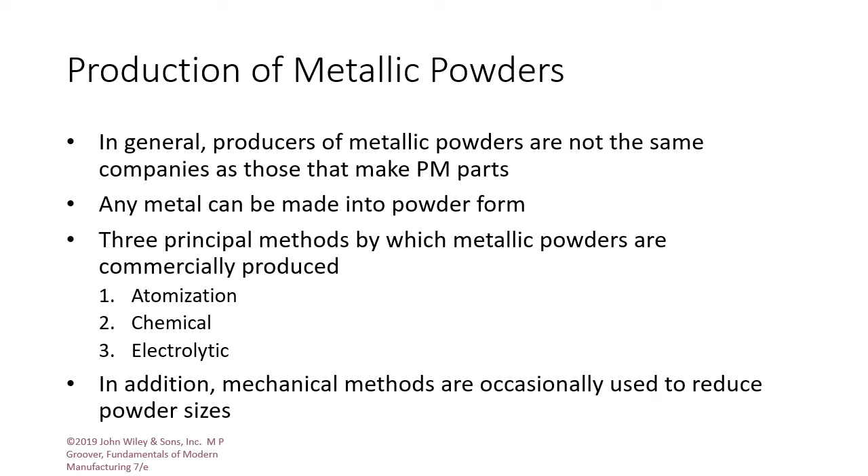The first method we will talk about is the gas atomization method. This method is based on the conversion of molten metal into a spray that solidifies into powders. So we have metal, which we first melt, and then using a high velocity gas stream that flows through the nozzle, we take the molten metal and spray it. During the spray, it will turn into solid powder.

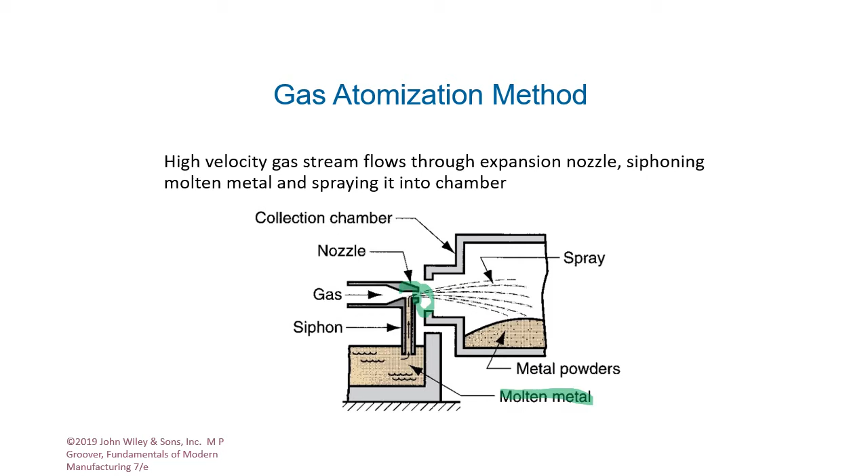We can use water instead of gas for the atomization method, which is very similar to the gas method. Here we have high velocity water streams that flow through the nozzle, water from this side, water from this side, and again we have the molten metal. We can see that it will solidify and turn into metal powder.

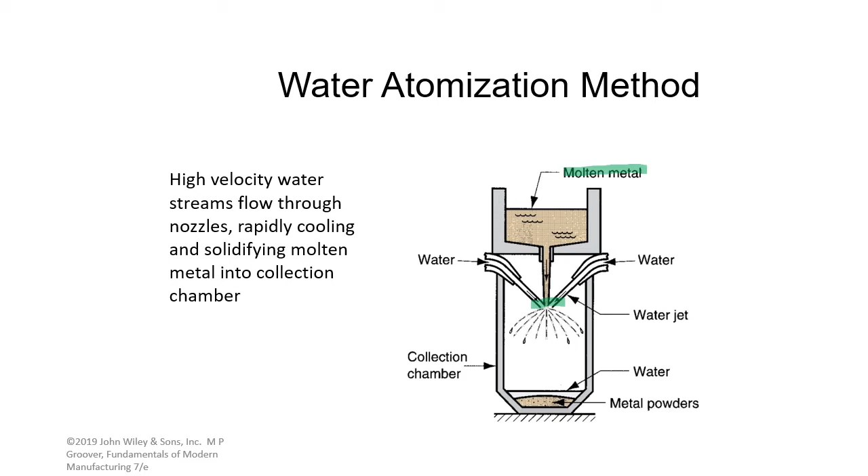The water atomization method is more commonly used and is specifically suited to metals that melt below 2900 Fahrenheit. In this case, the cooling is more rapid and the resulting powder shape is irregular rather than spherical. This is an example of iron powders produced by water atomization. You can see that the particles are not regular and we have different shapes.

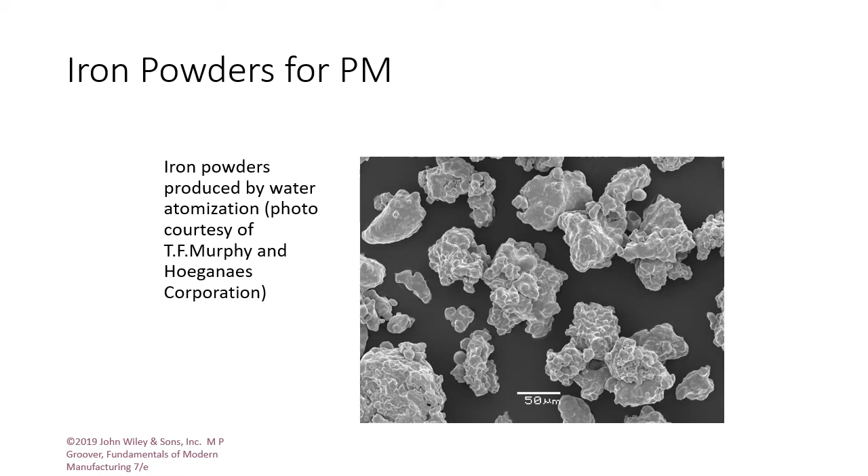The other two types used to produce metallic powders, chemical and electrolytic, you only need to know the names of these procedures. You don't have to know all the steps and procedures. So we're just focusing on atomization with its two types, gas and water.

Now, after producing the metallic powders, we need to use that powder to make products and parts. This step is called conventional pressing and sintering. The conventional PM sequence consists of three steps. The first step is blending and mixing of the powder. Next is compacting, in which the powders are pressed into the desired part shape. After getting the desired part shape, we have sintering, which involves heating to a temperature below the melting point to cause solid state bonding of the particles.

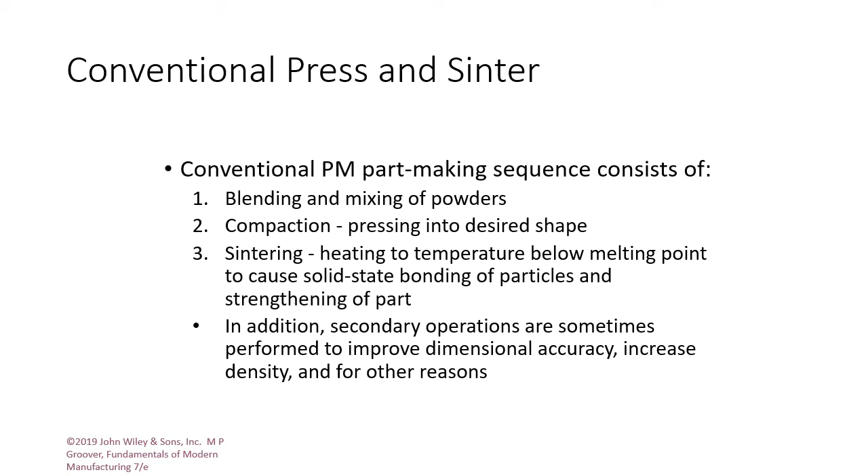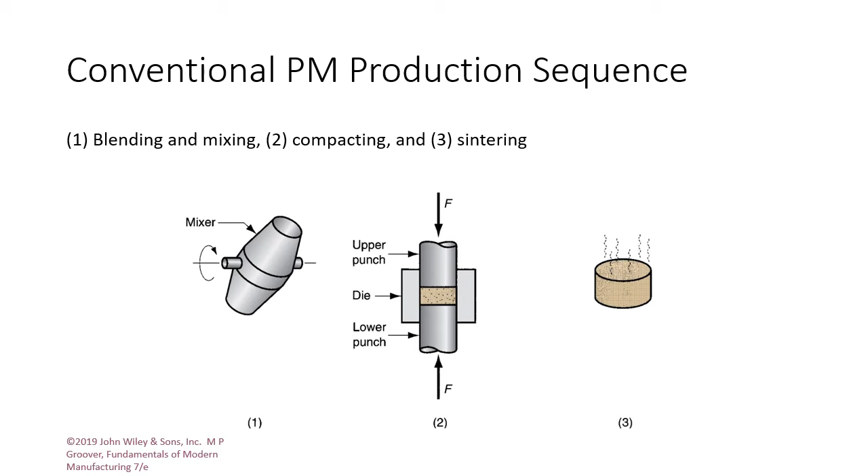In addition, we have secondary operations, sometimes performed to improve dimensional accuracy, increase density, or for other reasons. But these are the three main steps in the process: blending and mixing powder, compacting or pressing by applying high pressure, and then applying heat to get the desired shape. After each of these steps, we are trying to make the particles of the powders as close to each other as possible, and the shape as accurate as possible.

Before the compacting and sintering processes, and in order to achieve successful results, the metallic powders must be thoroughly homogeneous beforehand. So we have two main steps. The first is blending, when powders of the same chemistry but different particle size are blended together, which reduces the porosity of the powder. Then we have mixing, when we mix different types of metals together. This is one of the advantages of using PM technology, which gives the opportunity to mix different types of metals into one product, which would be difficult or even impossible to produce by any other type of process.

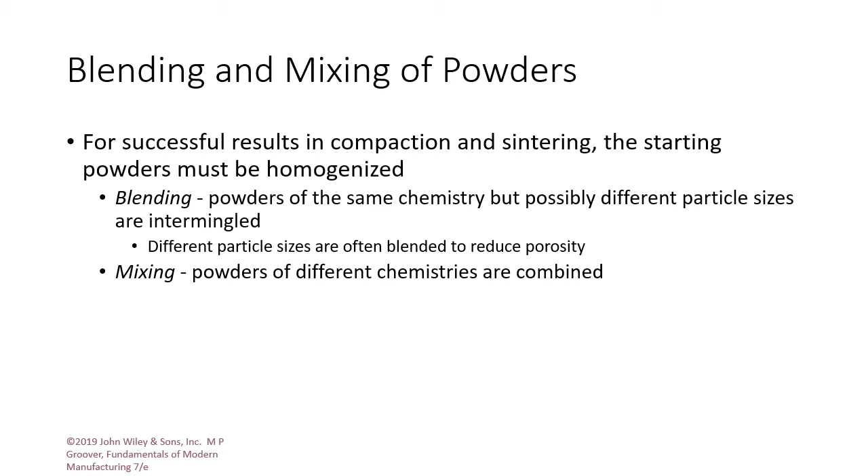After the blending and mixing process, we can go ahead and do the compacting. In compacting, high pressure is applied to the powders to form them into the required shape. The conventional compaction method is pressing, in which opposing punches squeeze the powders in a die.

The work part after pressing is called green compact. We have the green compact, which is the part or product after pressing but not sintering yet. That's why we call it green, which refers to it being not yet fully processed.

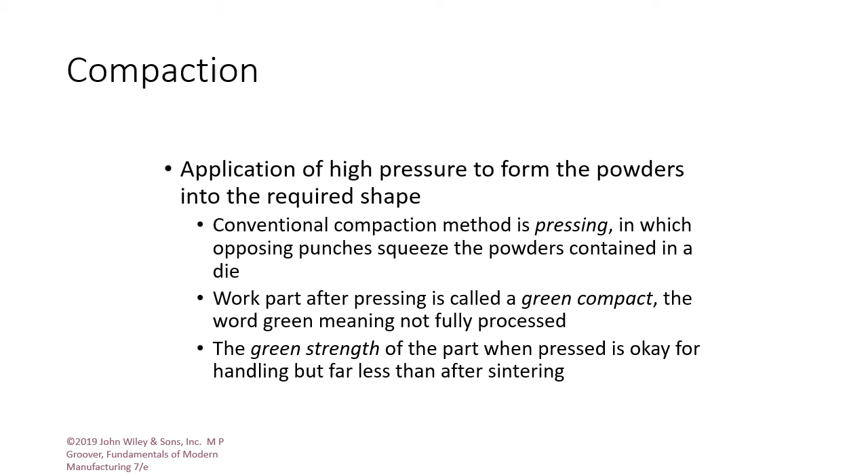In the same way, we call the strength of that part green strength, which is the strength of the part when pressing is okay for handling, but far less than what it should be after sintering.

This is the steps of the conventional pressing. The first step is filling the die cavity with powder, which is similar to casting when you fill it with molten metal, but here again it's a powder.

Step number 2 is the initial position of upper and lower punches during the pressing. We start the pressing. This is the initial position of the upper punch. So we have two punches, this is the upper one and this is the lower one.

The final position is step number 3, where we apply more pressure from both the upper side and lower side, and we can see that the product here is smaller in size, but has higher density and the particles are closer to each other compared to the initial position.

The last step is the part ejection. We release the pressure and the part is ready, not fully processed, but that part is called the green compact.

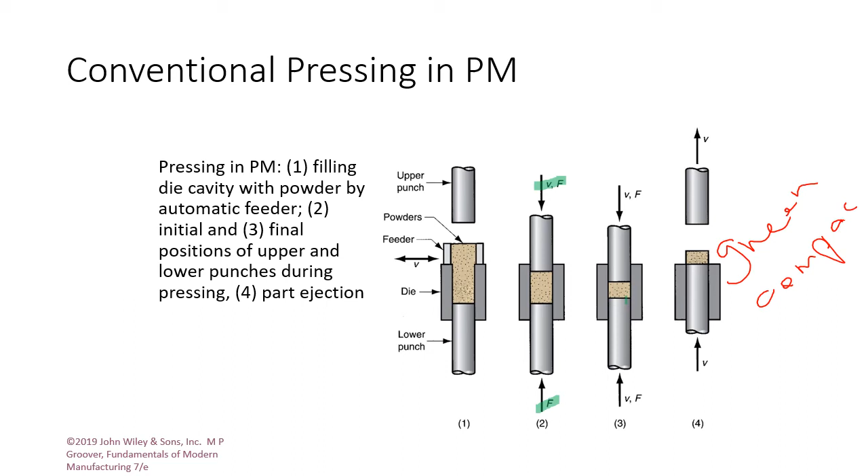You can say here is the green compact. Excuse my handwriting. That photo is for a hydraulic press for conventional pressing.

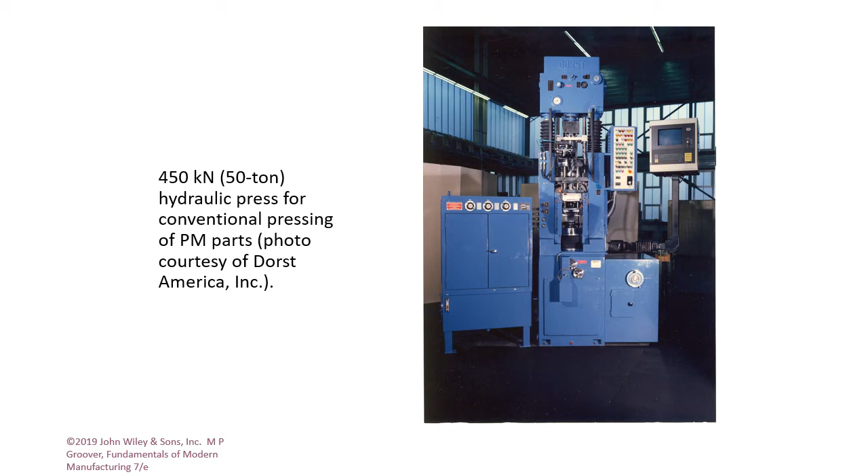The third and last step is the sintering. After pressing, the green compact lacks strength and hardness, so we need to improve the strength and hardness of the product by heat treatment, which bonds the metallic particles. Usually, we reach a temperature of 70 to 90% of the metal's melting point.

It's generally agreed among researchers that the primary driving force for sintering is reduction of surface energy, and the part shrinkage that occurs during sintering happens due to pore size reduction.

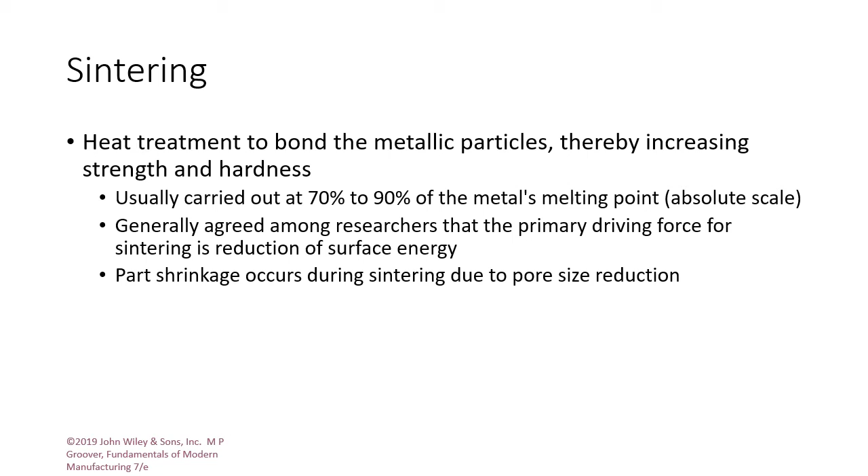This is the sequence of sintering when looking at a microscopic scale. We can see in the first picture here the particles and the point bonding between these particles. The particle bonding initiated at the contact point.

Now the contact point in the next step grows into necks. We have here points, then it grows a little bit into necks.

The other step is pores between the particles are reduced in size. We can see that the pores, or the small spaces between the particles, reduced in size, and the particles get closer. The neck here also expands, so you could have a thick or long connection between the particles, and the space, or the pores, is reduced.

Now the last thing is that grain boundaries develop between the particles in place of the necked region. We have here boundaries; the neck is converted into a boundary, and we have very small pores. The size of the spaces between the particles is very small. This is the end of the sintering steps.

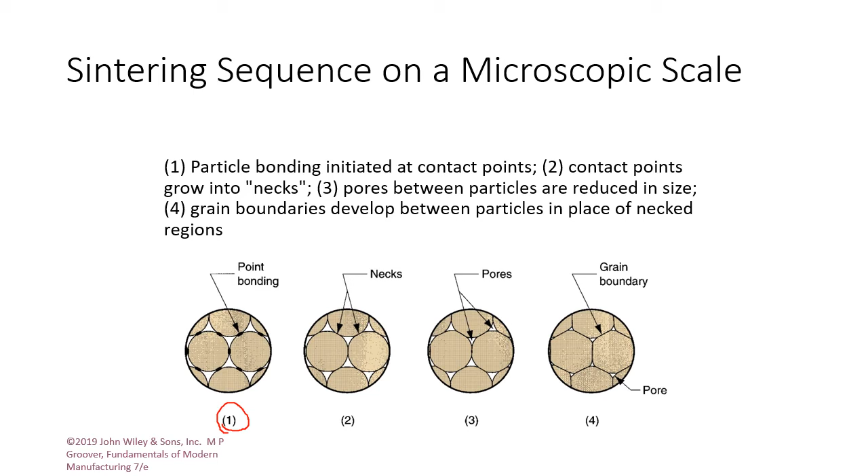Sometimes after the sintering, we need to do other operations or steps, which are called secondary operations. Since we get the final product's shape and size dimensions, we need to make further improvements, maybe increasing density, improving accuracy, or accomplishing additional shaping. That's why we need secondary operations.

We have different types of secondary operations. Let's start with densification and sizing. Here we need to apply pressure again, which is called repressing. So we have pressure, heat, then pressure again, pressing in a closed die to increase the density and improve the properties.

Sizing is pressing to improve the dimensional accuracy, so we get the correct dimensions. Remember in chapter 4 we talked about dimensions and accuracy. In some applications we need to improve the accuracy, that's why we use the sizing process.

We also have coining, which is pressing details into the surface. We have the correct surface, correct dimensions, the correct amount of density, but we need to add details into the surface, like a coin has details. That's why we call it coining.

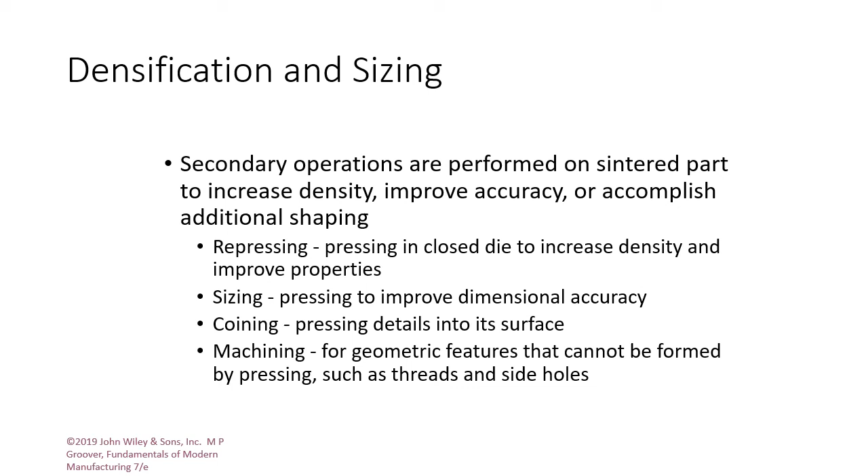The other type of secondary operations are called impregnation and infiltration. We previously talked about porosity and why it's important in terms of PM characteristics. This porosity can be exploited to create special products if we fill that available space with oils, polymers, or even metals.

The first one, impregnation, occurs when we fill oil or other fluid into these spaces, for example in gears. The other one is infiltration, when we fill the spaces with molten metals. We use this process to increase the density, so we don't want these small spaces.

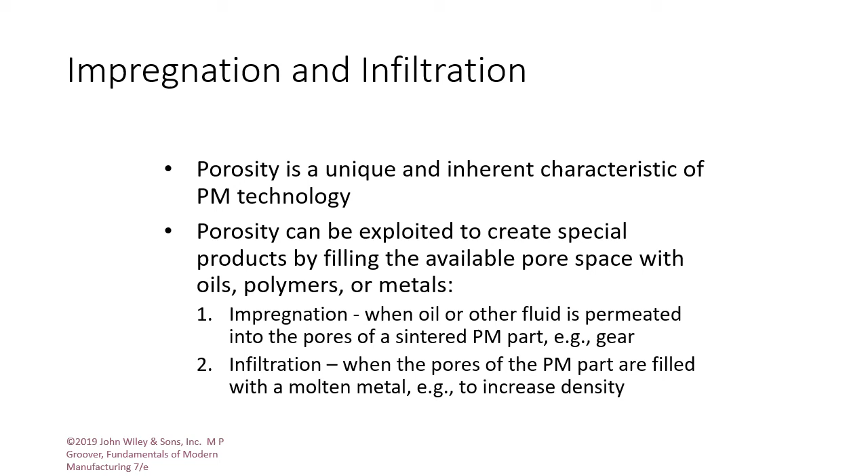We fill it with molten metal to increase the density and strength of the product. Pressing and sintering are the most widely used shaping techniques in powder metallurgy, but there are additional methods used to produce PM parts. The first is isostatic pressing, where instead of applying pressure from one direction, we apply hydraulic pressure from all directions of the part to achieve compaction.

The other type is powder injection molding, where we start with a polymer that has 50 to 85% powder content. The polymer is then removed and the PM part is sintered.

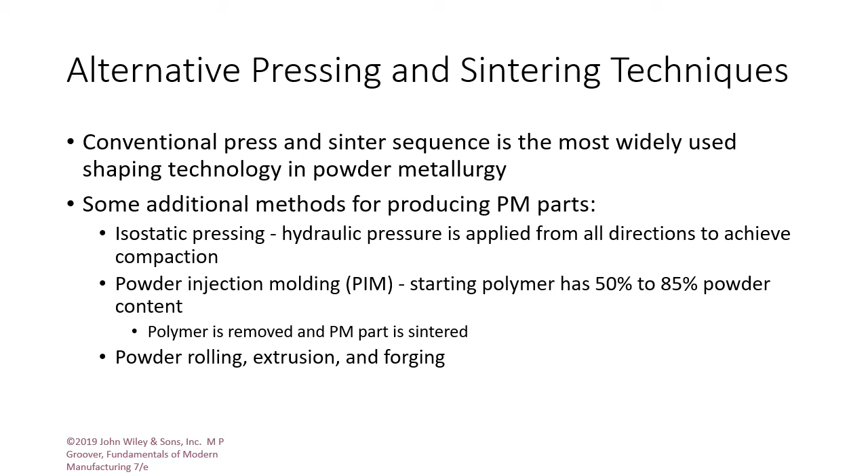The other type is powder rolling, extrusion, and forging. In powder rolling we have the feeding of the powder as the first step, then the rolling steps, then applying heat, cold rolling, heat, and the final product.

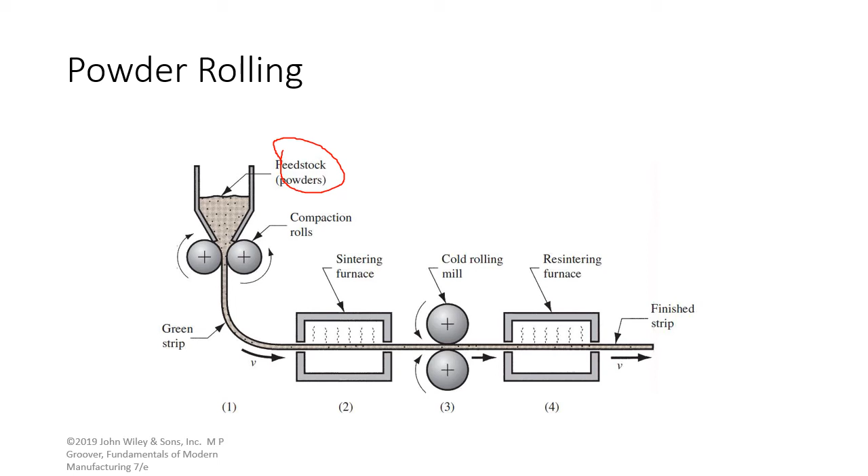This is for sheets, plates, or flat products. The energy required to reduce the metal and produce powder form out of it is high and requires additional steps. That's why producing the powder is more expensive than other metal working processes.

Now, PM is only competitive in certain ranges of applications. That's why we say it's good for high production rates and in some cases medium production rates.

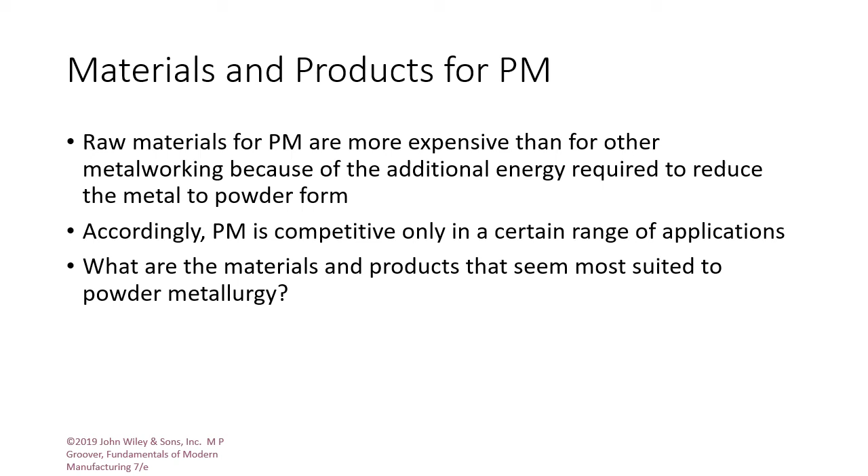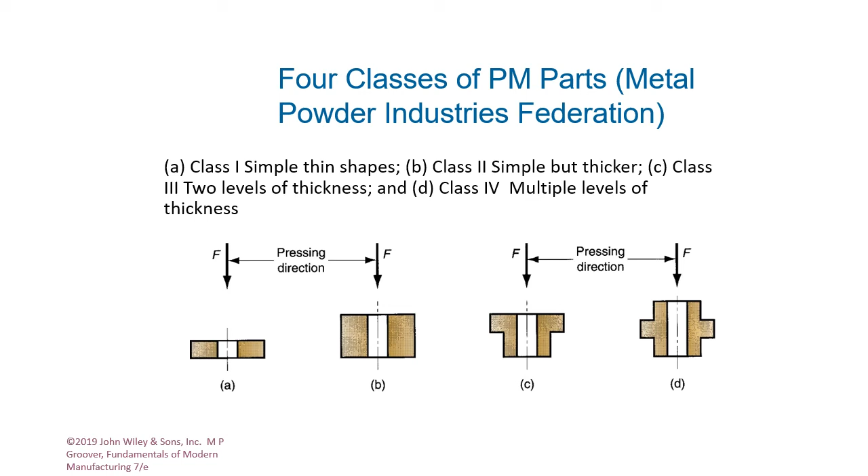These are some of the product design guidelines that will also help you answer the question. The minimum quantity needed to justify the cost of the equipment and special tooling is at least 10,000 units.

We talked about porosity and how PM is unique because it's capable of fabricating parts with controlled levels of porosity. PM can also make parts out of unusual metals and alloys, since in the mixing step we can mix different materials' powders together before starting the process.

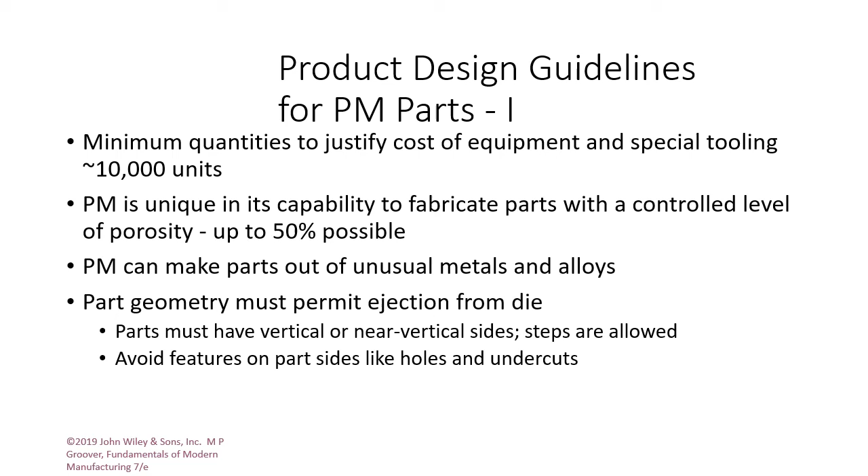Then we talked about part geometry, which must have vertical or near-vertical sides, avoiding features on part sides like holes or undercuts, because that will require another step after the PM procedure.

These two examples show the first one about a side hole and the next one about an undercut. These two features should be avoided in PM since part ejection is impossible.

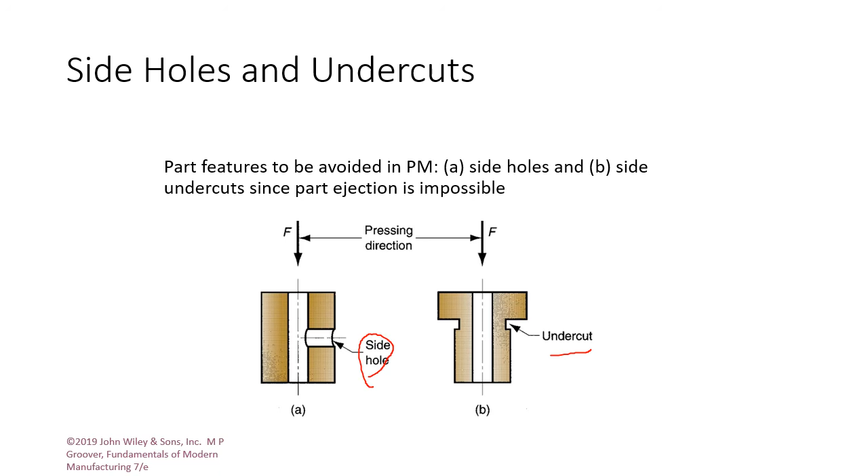Other guidelines: screw threads cannot be fabricated, so they must be machined into the part afterward, requiring an additional step.

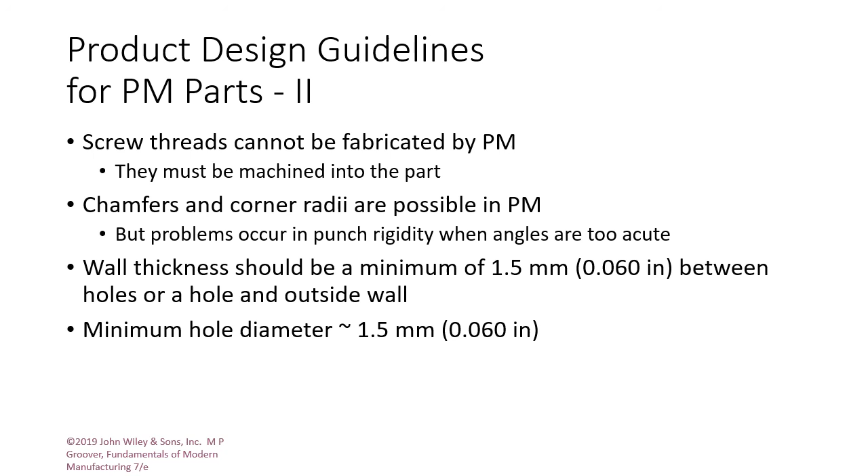Chamfers and corner radii are possible, but problems occur in punch rigidity when angles are too acute. The wall thickness should be at least 1.5 millimeters between holes or between a hole and the outside wall, and the minimum hole diameter should be at least 1.5 millimeters.